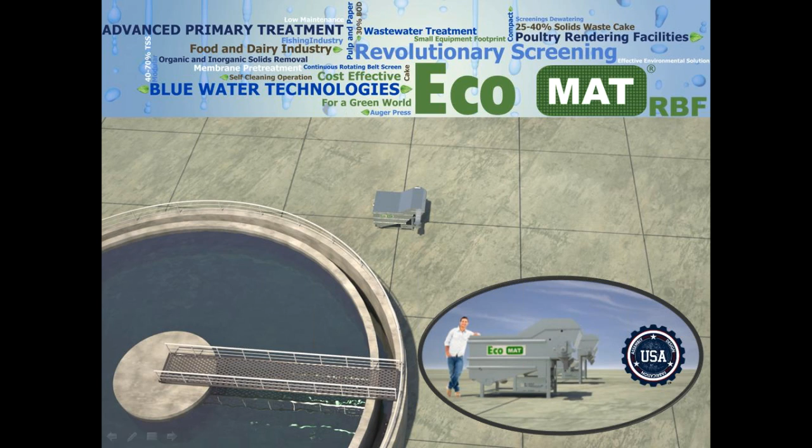So let's jump into this webinar. The technology that we will focus on today is the rotating belt filter, our EcoMat RBF. In the picture we show a 3.4 MGD EcoMat unit in perspective with a conventional clarifier, and you can see the direct footprint savings.

The EcoMat filter is a 4-in-1 process. Basically, you get your screening, your grit removal, your clarification, and your sludge management and dewatering in a single unit. It's a mechanical screening clarification device that gives you all of that in your dewatering. So we'll highlight some of the design features, some of the cost savings features as we go forward. The level of treatment and treatment efficiency is dictated by our design and operating parameters.

And these parameters are customizable to the application, to the end user's goals. Our focus being the EcoMat rotating belt filter, I want to give you a brief overview of Blue Water's background and history with this technology.

So I'm going to briefly tell our story to begin this presentation. Then I'm going to define a rotating belt filter and share some good videos and pictures to demonstrate its flexibility, its method of operation, and generally what it looks like.

This slide contains several pictures from rotating belt filters operating around the U.S. And here you see a head roll with the mat of solids being cleaned from a rotating belt filter device. So this device is installed with raw sewage coming into it. So this is before any screening, grit removal, etc.

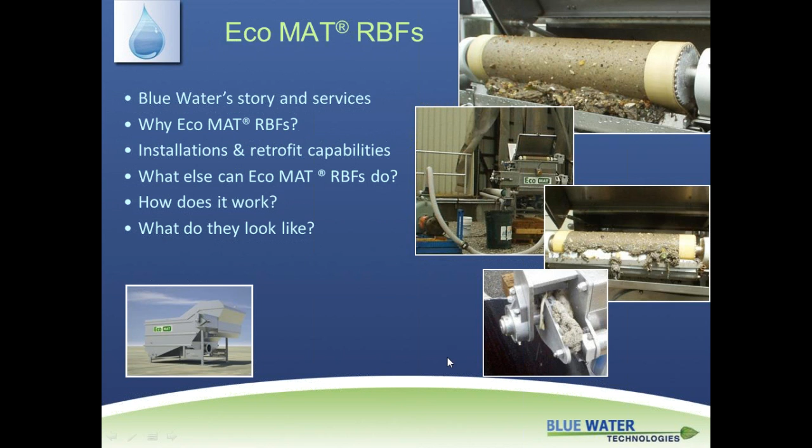So I'm going to start again by telling you Blue Water's background, Blue Water's story here. And Blue Water's really grown up in the USA. We're a USA manufacturer. Blue Water as a company is about 10 years old now, but we grew from a couple of other companies that have a good 20 to 30 years of wastewater history in the United States.

So we're a US-based manufacturer. All of our units and operations, as much of our components as possible, are made in the USA. We produce turnkey solutions and unit processes. So we focus on unit process efficiency, like our EcoMat rotating belt filter. I'm going to share some of the ways that we've developed that product line. But we can also focus on turnkey package solutions as well for the industry.

We've done a lot of package plants. We do a lot of mobile systems, not only for contract work and lease options, but remote systems like you would have in some of the mining camps to treat sewage works.

But we also do contract treatments for pilots, where we're delivering turnkey systems that need to be delivered to a site and online within a day. So we have a very capable manufacturing, operations, and service team for those scenarios and those kinds of applications.

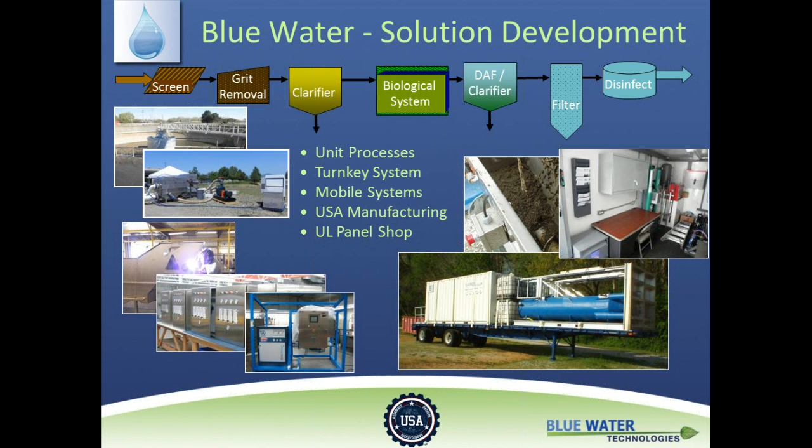We have a UL listed panel shop, which gives us a lot of flexibility in delivering and integrating to existing infrastructure and existing control systems. So we can tie in our PLCs for equipment seamlessly into existing SCADA systems, etc. That's Blue Water's capability. We have a culture of customer service. And with that, I'm going to start talking about our rotating belt filter.

Blue Water has been providing, installing, and servicing rotating belt filters for 8 years in the wastewater industry in the United States. Rotating belt filters as an umbrella technology is about 20 years old. It started in Europe, so with that 20 years of history, it's a very well understood, very capable process, well modeled as far as operations go.

One issue we see bringing technology into the U.S. is that a lot of it was developed a while ago. It's been proven, but it hasn't been improved upon as the need grows. So rotating belt filters had been fairly stagnant, and that's where Blue Water, through our design, implementation, and service history, learned ways to improve that technology and answer industry needs for an improved product line.

Blue Water launched our product line in 2012, the EcoMat product line. What we focused on was ease of operation, ease of service, and a reduction in overall costs. These systems are fully modular, fully automated, and operate essentially by themselves. Everything's automated with level control, pressure sensors, etc. Essentially you get a very high rate of clarification without chemical usage in a very compact footprint. That screening, grit removal, and clarification can replace a huge amount of infrastructure.

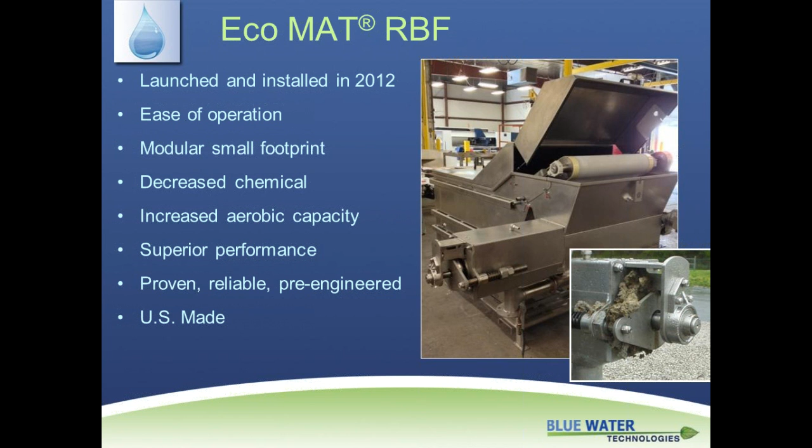There are different motivating factors to this. Some of it is simply cost-based, where you can get a payback if you're doing a plant upgrade versus conventional treatment. Some of it's getting aerobic capacity back, taking load off the secondary system. We've installed a lot of systems in the southeast for that reason. But ultimately what you get when you contrast rotating belt filters with conventional treatment is superior performance, superior TSS reduction, particle size control, hair and grit removal, etc. These are great in front of membrane systems for that reason.

When we look at new applications, there's a lot of different reasons to consider rotating belt filters. As far as design considerations behind implementation, we can start with the baseline we use when designing any Headworks system or primary clarification system. Really what we're looking at is the level of treatment, the treatment quality. What can we get to with implementation of rotating belt filters? Typically we're removing anywhere from 30 to up to 80% of the TSS with rotating belt filters, in addition to maintaining good particle size control going into the secondary system.

With that level of treatment, we have a high level of simplicity. You'll see this when I share a couple of videos illustrating how this system operates. It's a very simple system that produces this high level of treatment, and it's very easy to provide a multi-barrier approach with this because of its modularity.

As we've developed this product line, we've focused on ease of maintenance, which is a very important consideration. It's not only a cost savings thing, but it also ties into safety, another big consideration for Headworks design. We have to look at confined spaces, how much rigging and heavy equipment is being manipulated by operators. In addition, we're looking at environmental and odor control requirements as well.

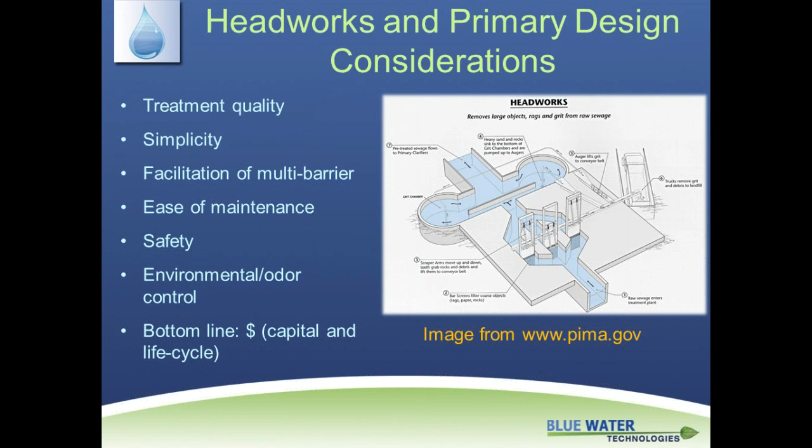As I mentioned, the bottom line is cost savings, it's money. This is yet another image that brings that concept home. You can say money in terms of space, as we've shown, contrasting the 3.4 MGD EM30 to conventional clarifiers, or you can say it in terms of capital costs, which you look at with a conventional clarifier.

And that's a 0.5 MGD capacity unit there. So again, you get a very high level of treatment in a very compact footprint. And you have two drives on that system there. It's a 1 horsepower belt drive and a 1 horsepower auger drive. So very low cost, very low input to cleaning the belt, to operating the system. There aren't any blowers involved. That was one feature that was used in older systems that was added to the expense over the lifetime of the system. And with these rotating belt filters, you'll see that they're very economical to own.

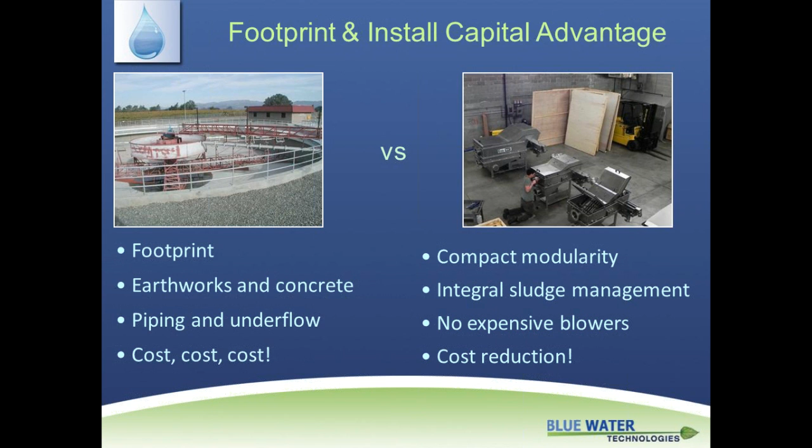The first video that I'm going to share is of an EM3 unit operating, which is a 0.5 MGD unit, and it's operating at capacity, just so that you can see what they look like in person.

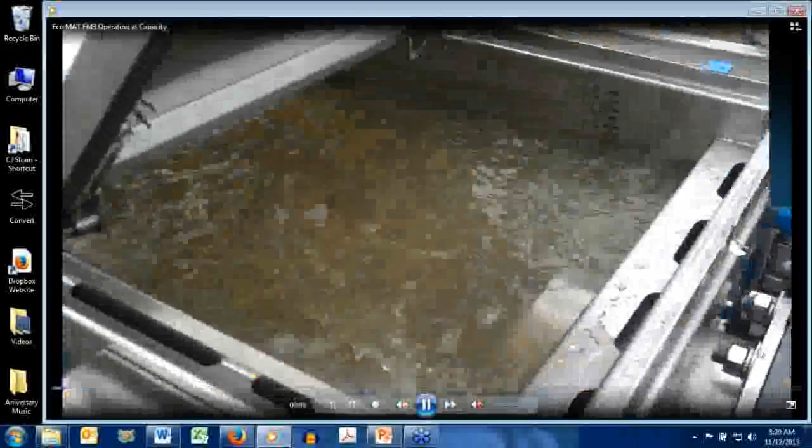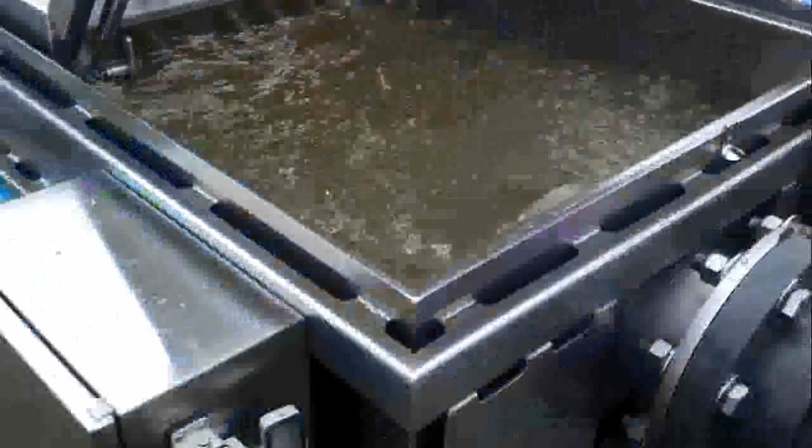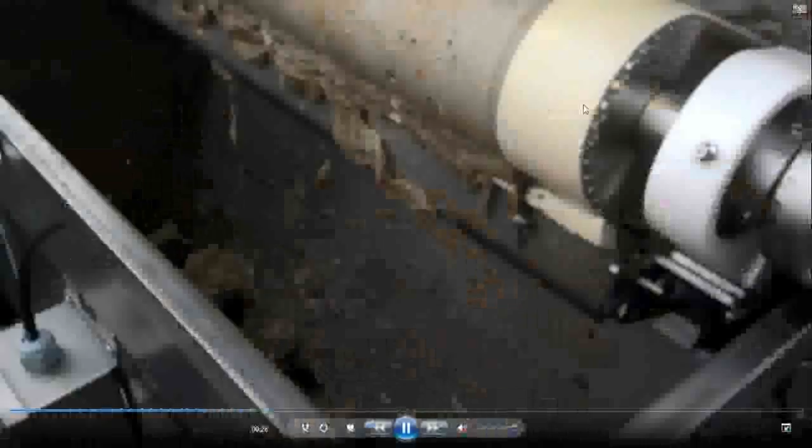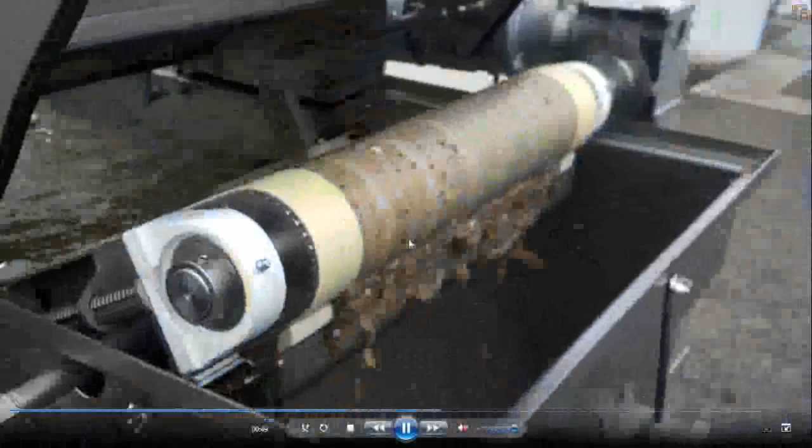So again, as I mentioned, this is an EM3. This is the influent water. The influent would come in through a pipework and enter this influent bay. This is on a level control with a flush wall-mounted sensor. We call it a foul-free sensor because it reduced a lot of issues that we had with plugging with some of the older styles that we used to provide to the industry. So that was an improvement. This level control bay is really controlled by the sensor tied to a PLC, and the drive on this belt that's discharging, the mat then discharges the captured solids over into this solids collection bin that you see here at the bottom. So this represents a very high capture rate, roughly about 60% of the influent TSS, and that's, again, doing your screening and grit removal here as well.

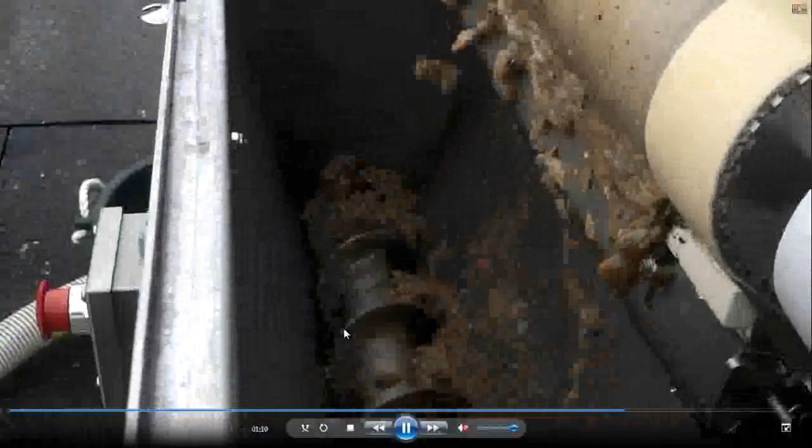That sludge is discharged to a sludge bin, and then it can be conveyed to a compaction section, which you see here. And that integrated dewatering provides roughly a 30% dry cake. Typically, we can get higher, but it depends on the economics of squeezing the additional water out of that. This bin is actually designed to aid in that dewatering. There's a perforated plate in the bottom that allows further dewatering without a lot of compression and energy involved.

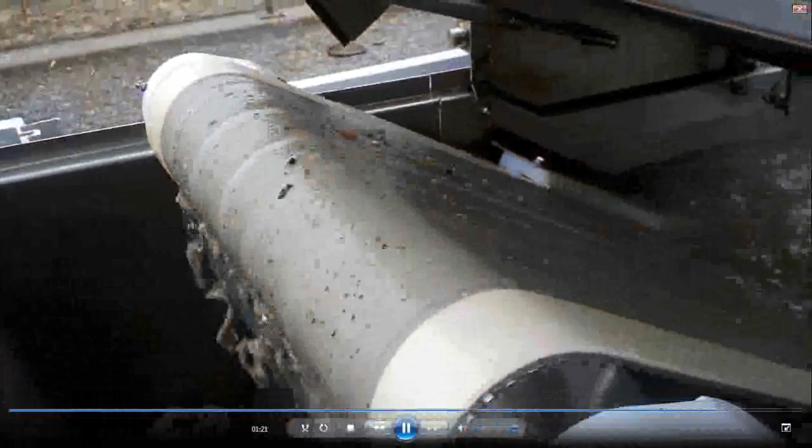So that's an EM3 system in operation. Again, what you're doing here is 4 processes in one. You're getting your screening, your grit removal, and your clarification, and then your sludge management.

And my next video is an animated video that will highlight the mechanism of capture, the mechanism of removal, so that it's a little bit more clear.

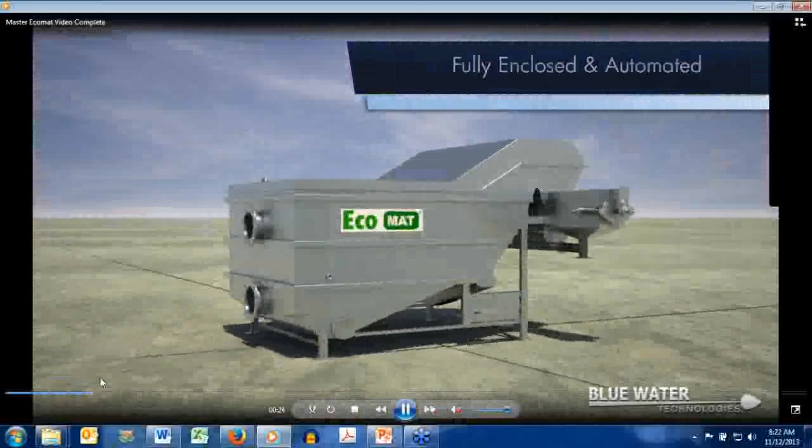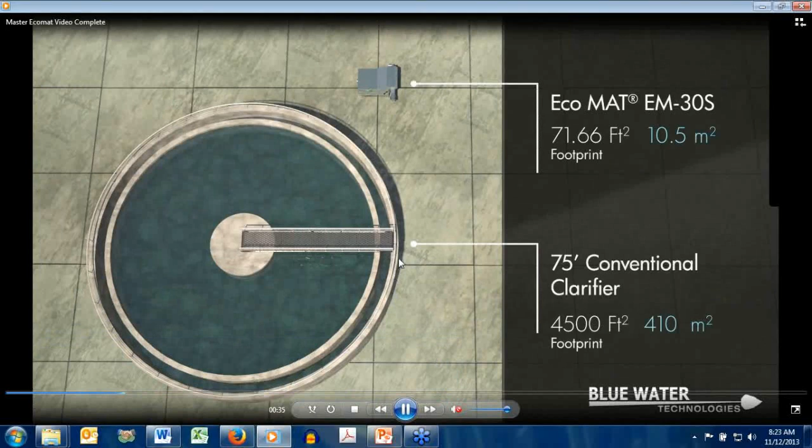I'm just going to skip ahead here. What we have here is our EM-30S unit being highlighted here as we go around the unit so that you can see the different features. Again, we would have a wall-mounted sensor in that influent bay. And when you contrast it again to conventional clarification, we're roughly 5% of the footprint. And that becomes even more important when you're in bigger plants, if you're in a 15 to 20 MGD plant where you have multiple units.

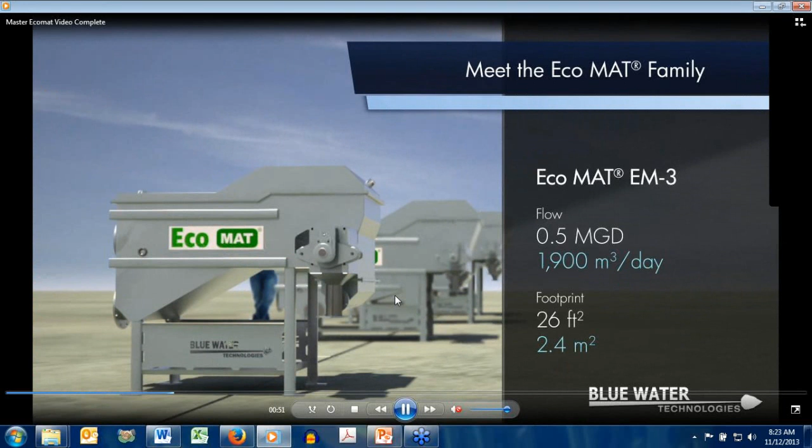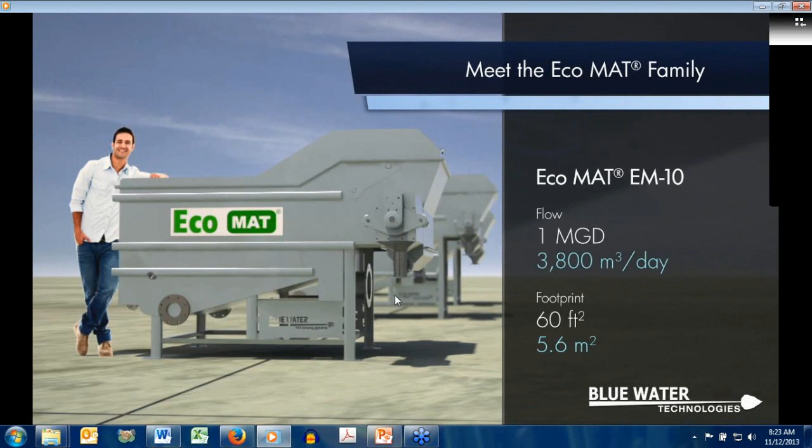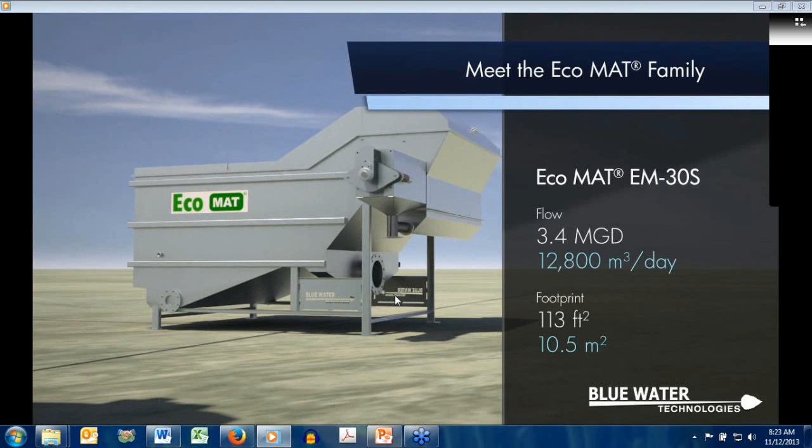Now this is a very mature product line, like I mentioned. We have multiple units within the product line ranging from 100,000 gallons per day flow, with our largest unit flowing roughly 3.4 MGD. Now this is all based on typical primary sewage influent, raw wastewater, typically between 250 and 350 milligrams per liter TSS. So that's what those loadings are based off of. Those loadings will change with solids. We are in some industrial applications where it's thousands of milligrams per liter coming in, and we will derate the equipment slightly.

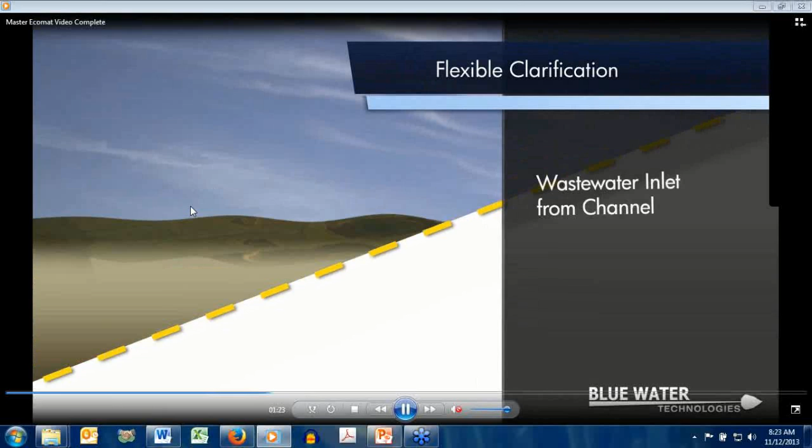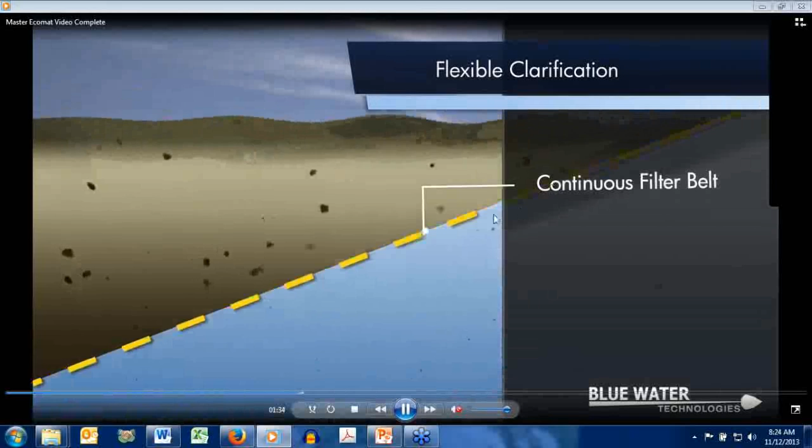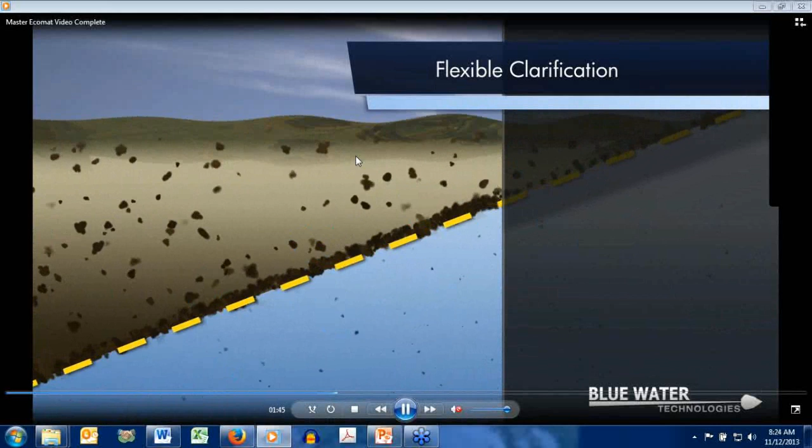So when we look inside of the EcoMat machine, again, this is a cartridge-mounted rotating belt filter, so you have a continuous loop mesh. This influent well, which we see animated here, again has a pressure sensor in it. So we can maintain a level control through a PLC, and really what maintains that level is that this belt is driven by a motor, again through the PLC. And that PLC is reacting to the head level, which will change as the particulate from the influent wastewater builds a mat of solids on this rotating belt filter. So that's really the key behind this technology, is controlling that mat thickness and getting that removal.

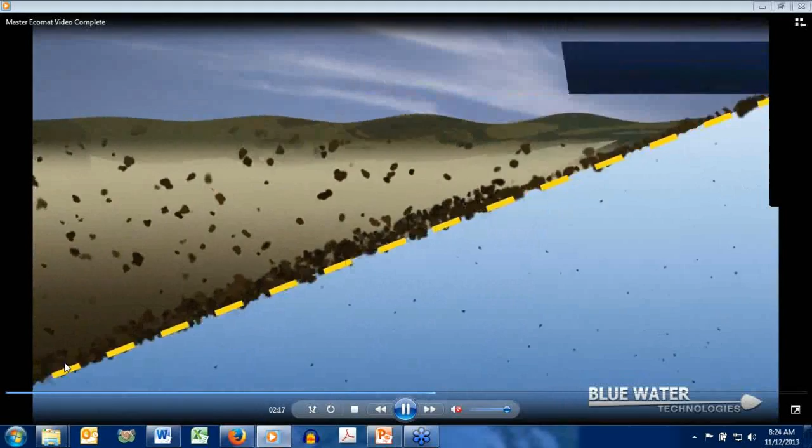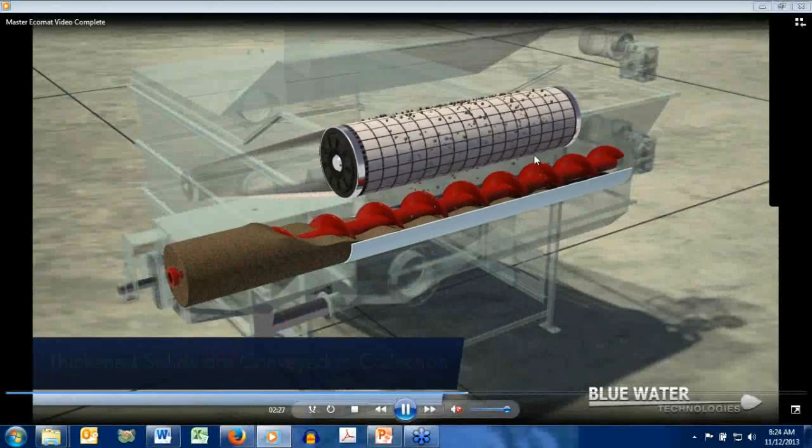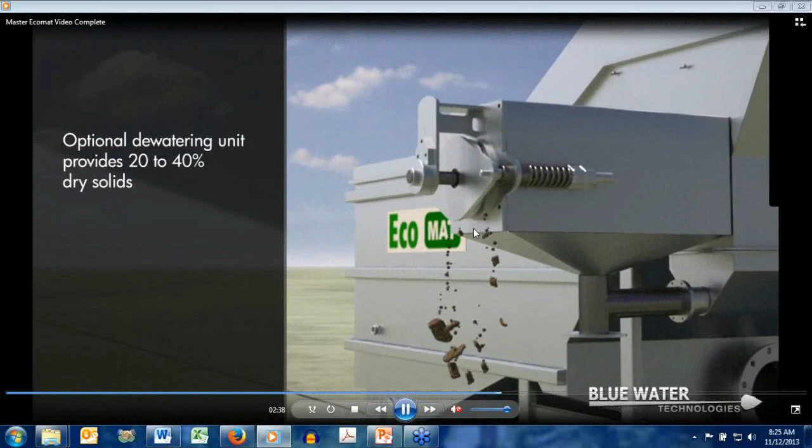So initially you're getting screening to the pore size of the mat, but then you build up that solids mat and you're actually getting filtration through it. And then you get the integrated conveyance of that sludge, of that captured solids, up into the sludge conveyance bin. And then dewatering is an option. This is a very robust dewatering design that Blue Water has worked on for many years now. We've provided dewatering equipment to the industry, and we integrated some of our best designs into this EcoMat rotating belt filter product line.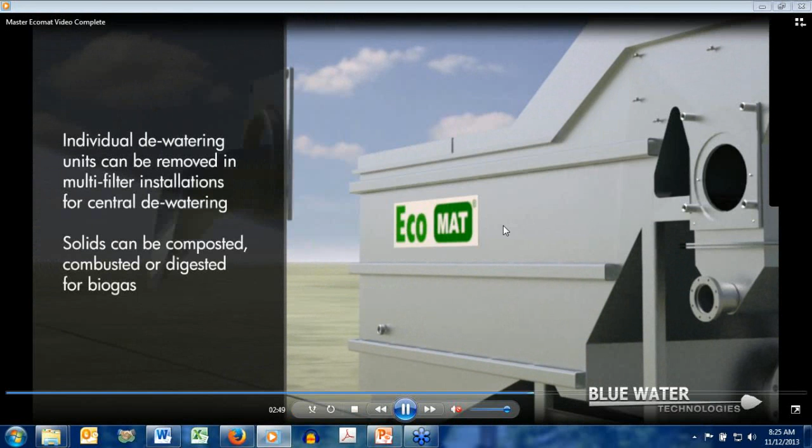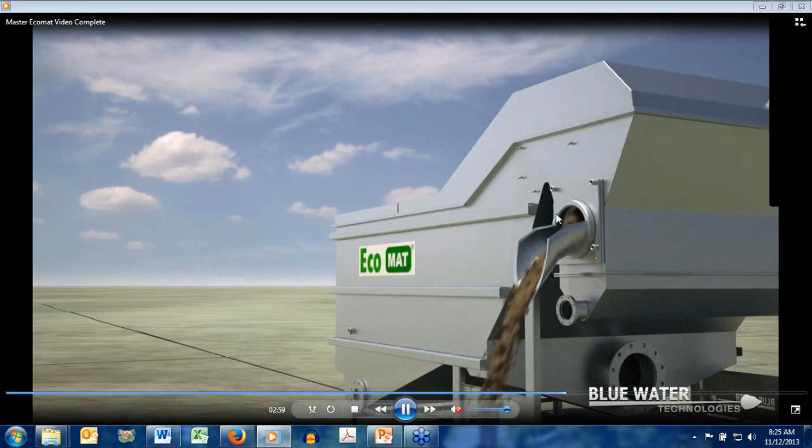Now, dewatering is an option. There are many plants that might have anaerobic digestion on site where they don't want to dewater. They just want that high level of solids brought into their digesters. And coming off the belt, those solids are roughly about 10% dry solids.

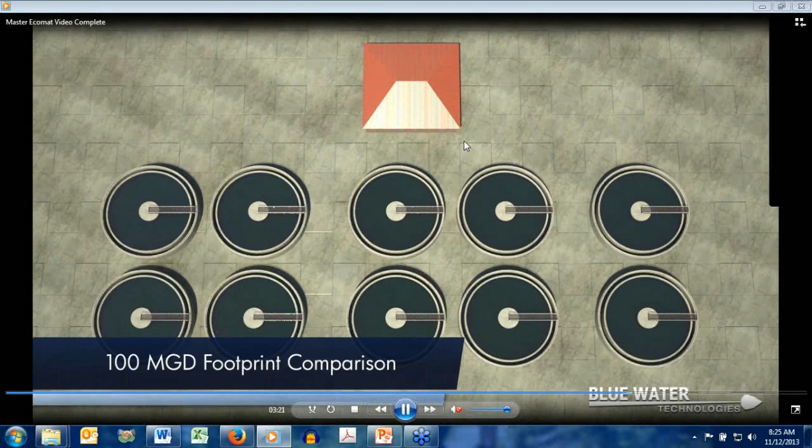Now, when we're talking much larger plants, we can also install these rotating belt filters in modules, and it's very easy to get your redundancy with this overall design. These are typically for very large plants. I do have a couple of plants with 5 to 10 cartridges, anywhere from 10 to 30 MGD design flow, that are going with this channel mount design.

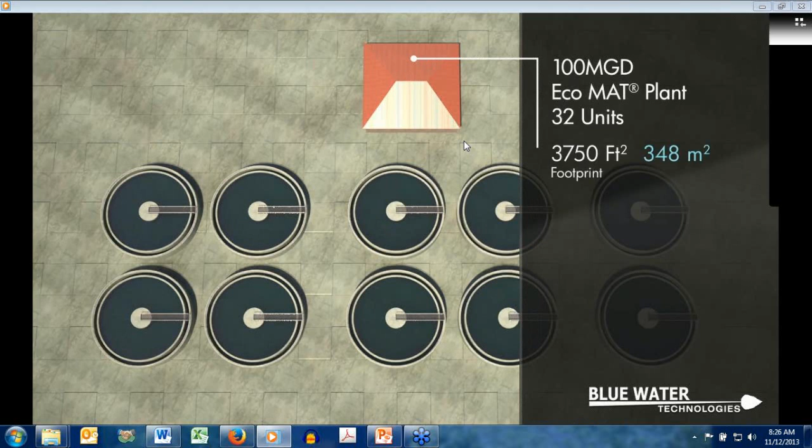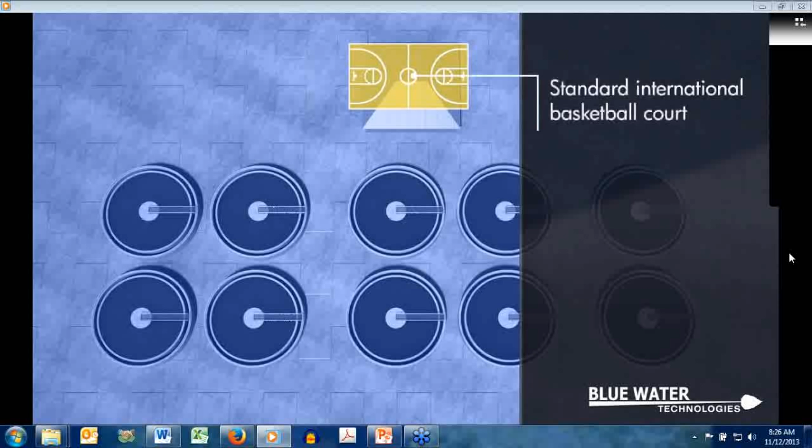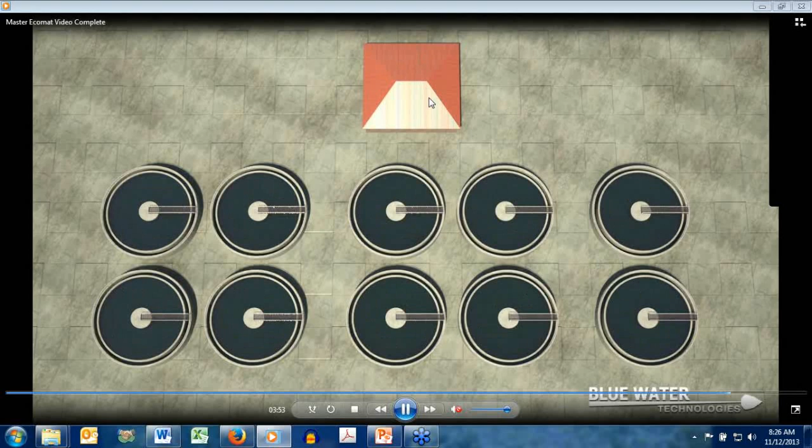In fact, some of the largest installations in the world for this technology, the rotating belt filters, is a very large plant in Mexico, over 100 MGD, actually peaking at 300 MGD. So a very large capacity with this modular layout style, and you can see the space savings potential for this technology and equipment.

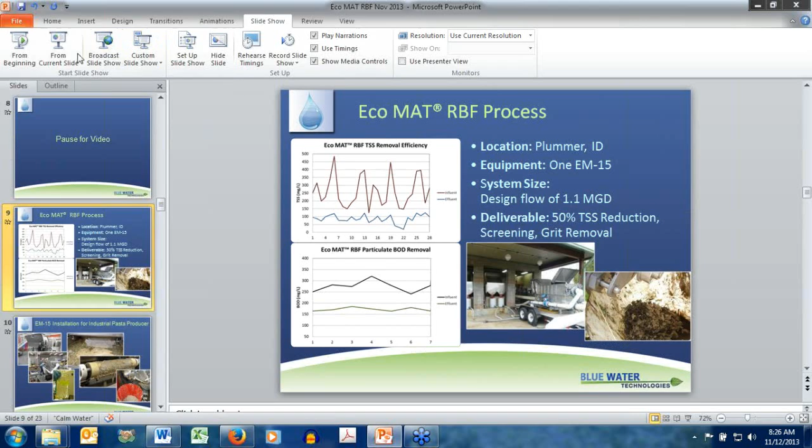So I hope that gives you a good idea of how the system operates, the method of removal, etc. Over the next 3 or 4 slides here, I'm going to share some of the case history that we have for the rotating belt filters and illustrate some of the different ways that it's been configured for operation.

This first one has a really good story behind it. The city is Plummer, Idaho, and we brought an EM15 EcoMat system down to Plummer. Now, they had a big problem with their Headworks, so it's very appropriate for our topic today. Their issue was it was actually a fairly new Headworks building, but they had installed screens for their primary or the Headworks screening and grit removal.

You can see those screens in these pictures, they're still in this plant. The issue with these screens is they had no automated cleaning, no degreasing, so the operator was getting up on a ladder and pressure washing these screens with hot water every single day.

So we mentioned all the considerations that you think about when you're designing a Headworks system, and there's so many reasons to fix that solution. One is the cost and the time spent cleaning these screens, but also the safety - you're up on ladders, working with high pressure hot water wash to degrease these screens, etc.

So huge issue. And the way that Blue Water helped to solve this issue with an EcoMat was we simply put one of our compact systems on a trailer. This is a system designed for roughly 1.7 MGD, which easily took the plant flow of 1.1, and provided them with a very effective solution for their screening and grit removal, and provided a nice TSS reduction as well.

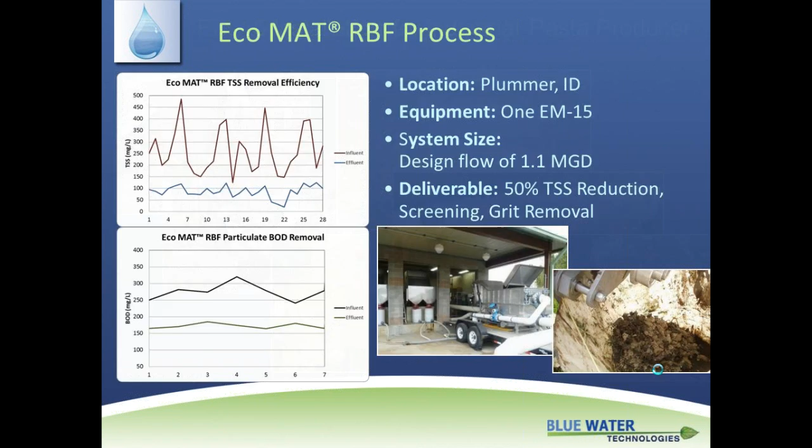This next case history is actually an industrial application, but I wanted to share it because it illustrates the flexibility of the EcoMat system. The EcoMat system is very capable of handling very high TSS streams.

Now, this is a pasta producer in the Midwest. They have anywhere from 3,000 to 5,000 milligrams per liter TSS in their wastewaters. Now, they were having issues meeting their TSS target in their effluent before we brought this rotating belt filter in.

We did some jar tests, we optimized the chemistry. This one we did add chemistry to because they needed a high 80 to 90% TSS capture rate. So this system illustrates good planning on the part of the engineer.

Blue Water got involved with the jar testing, the pilot operations for the engineer, and then I believe it was actually the engineer that purchased the system to get them - again, it was within 30 days of having tested because it got them the solution they needed, and they were installed with an EcoMat rotating belt filter. But again, it handles TSS very well, handles high FOG and fats very well in addition to that.

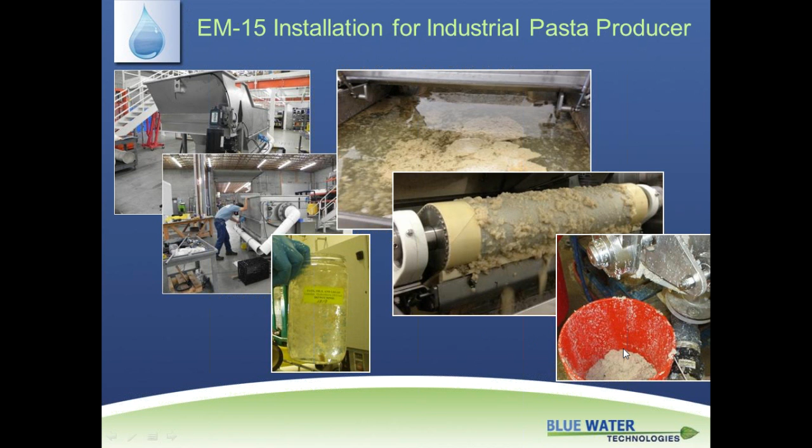The next case history I wanted to share with you is another municipal case history. This is in Post Falls, Idaho. This is an EM3, so it's a 0.5 MGD unit. This was actually a pilot system that was brought to the site. They're in more of a 5 to 10 year plan for upgrading. They currently have grit removal and fine screens going into their secondary, so no primary treatment.

And in the next 5 to 10 years, they're going to be upgrading that plant. The target here to model the system for their design was to achieve 50% TSS removal, get them their screening and grit removal, and dewatering as well. You see the operating line in this chart here, that's representative of roughly 59% TSS removal, so we met that target, and got roughly 38% BOD removal, so we met their target with BOD screening and grit removal as well.

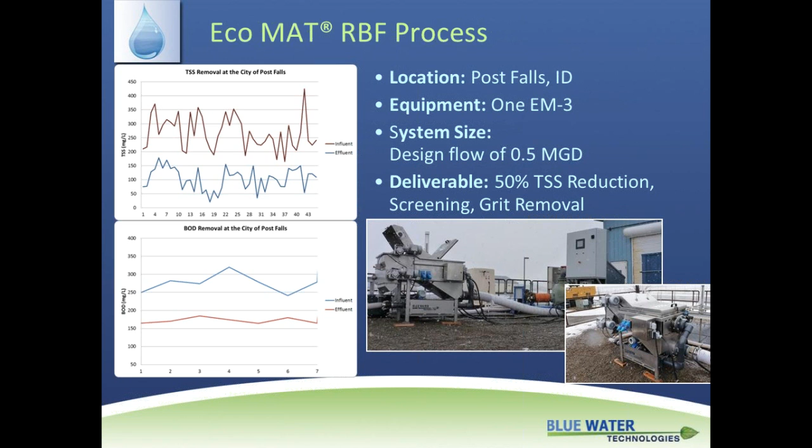Now, on this particular pilot project, we demonstrated that we can actually adjust our dewatering settings to achieve anywhere from 20 up to a good 45% dry solids with the sludge management. Now, again, that's a balance of energy input to dewatered solids and your trucking fees. And you don't necessarily want to dewater if you have digestion on site. So, also in that case, you might not want your screening and grit in with your sludge going to a digester. But those are all design considerations that Blue Water and engineers have worked on very closely in the past, and I'm sure we'll work on together in the future.

This is another case history where we're doing the screening, the grit removal, the primary clarification, and sludge management. Another EM3 unit, this is actually a full-scale unit. The treatment design flow for this plant is 0.4 MGD, so it's a slightly smaller community plant. The goal was 50% TSS reduction. Really, though, they wanted their screening and grit removal. The TSS wasn't as important to them, although you see the performance of the system here on the screen.

You do see they have a lot of rags coming in. This is a community, it's an assisted living community actually. Not that their wastewater is a whole lot different than anybody else's, but in this particular application, the plant had no screening, it had nothing actually. So it was just taking the raw water and screening, removing all of that TSS, and then dewatering and compacting.

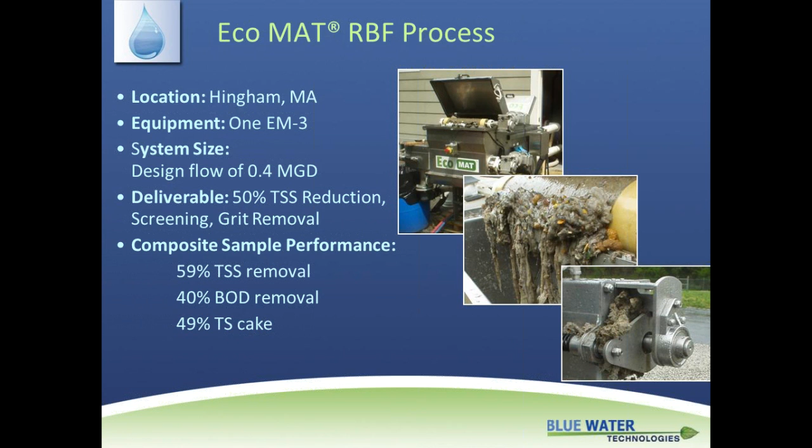Now you see a very dry cake here. Again, we can back off the tension, the back pressure, to give anything between a 20 to 50% TSS or TS cake. And again, our target really is one, pass the paint filter test so that you have a lot of disposal options, and to make it as economical as possible to manage the disposal of that sludge, that cake.

This last project that I want to share with you is actually a combined sewer project. And I think this is going to come up a lot in the middle U.S., where there's a lot of combined sewers. There's peaking events due to infiltration, etc. Those applications are ideal for, I should say, the EcoMat rotating belt filter is ideal for those applications. We can manage a very high peaking factor. This case history actually had a 10x peaking factor, and the deliverable really is to meet that discharge target for TSS so that the site can simply disinfect and discharge during those high peaking events, where appropriate.

So we went into this project and we were aiming for a minimum of 50% TSS reduction. We were actually able to average 70, and we actually pushed it, as you can see in this chart, up to 80% TSS removal. And this is all about adjusting and really customizing the operation parameters.

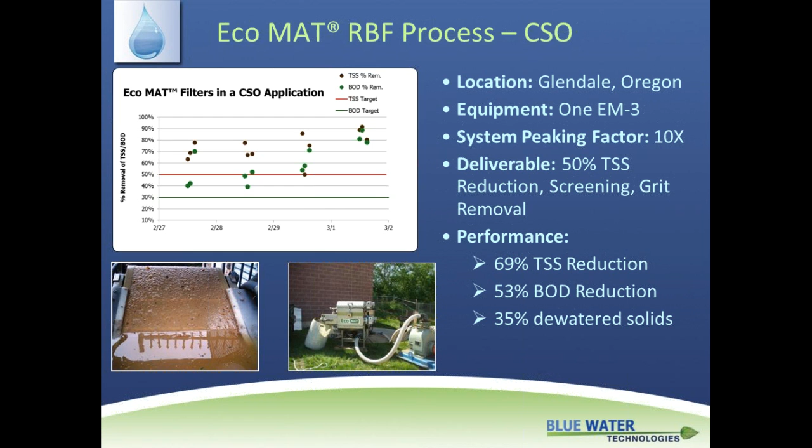There's no chemical involved, it's simply the EcoMat rotating belt filter. And we go in with a smaller pore size for this kind of application, and then just adjust the PLC settings so that belt movement is very slow, and we're building up that particulate, that mat of solids, and that mat does our filtration and screening for us. And again, the slower we move that belt, the more capture we get. So we might have to derate the equipment slightly hydraulically and go with a finer mesh, but it's very capable of meeting these primary treatment goals in CSO applications.

Most projects for us begin in the lab. We have a very capable operations team that can do bench process simulation for new applications. We use this a lot more in industrial applications, but we have used it quite extensively in municipal applications as well. I would say we did it more 8 years ago than we do now, because we have quite the installation base and reference list now for municipal projects anyway.

But for a lot of industrial projects, or even if we need a few data points on a municipal project, we can do bench tests where we basically use sieve discs, and we'll pour water through these discs, and we'll look at the formation of a mat, the thickness of the mat, the porosity of that mat, and its capability to do further filtration in our rotating belt filter methodology. So that's something we can do on a bench scale.

We can bench scale actually all of our product lines. We do it with Blue Pro systems, our clarification systems, other than the EcoMat, like our EcoDAF, Eco IPS 55s, and our press dewatering, etc.

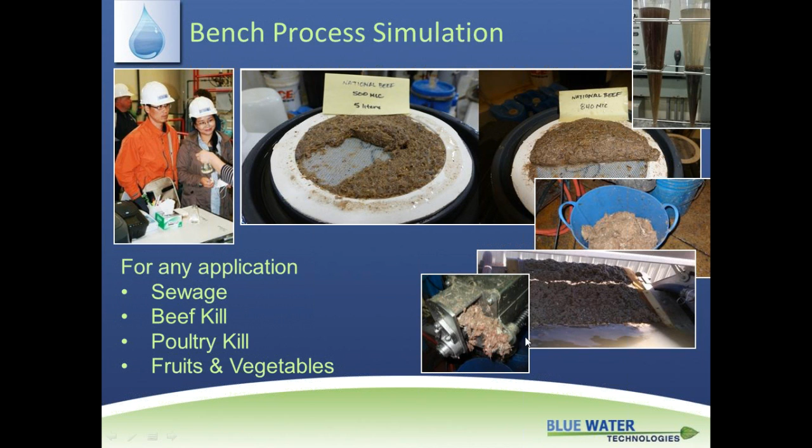Now, I've mentioned that's a first step into a lot of different industries. Here's a list of the different industries where we have experience with rotating belt filters. And we're actually getting a lot more interest in the EcoMat because of how much we've improved the technology with energy reduction and serviceability. I've talked about grit removal, fine screening, primary clarification.

I would say one of the biggest growing applications in the municipal world is membrane pretreatment. Screening, getting all that grit, hair, plastics out so that you're not fouling membranes. That's a huge application, and I think we're going to see it grow quite rapidly over the coming years to protect membrane plants, whether they be MBR plants or plants that have tertiary membranes.

Sewer overflow I mentioned and highlighted as well. We've been in a variety of different industries. We have installations in the dairy industry, applications in pulp and paper, textiles, tanneries, etc.

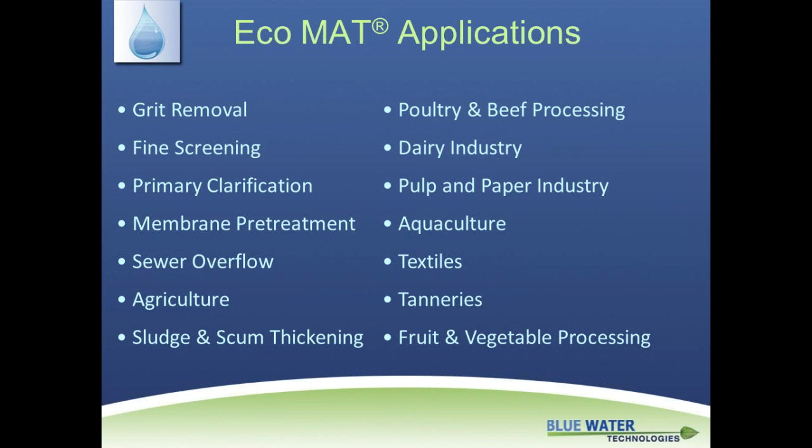And I mentioned oils and greases. It handles oils and greases very well. We see a lot of that in the meat processing industry with poultry and beef kill. We can see TSS up to 5 to 10,000 milligrams per liter. We can see BOD in the several thousands. And this system is very well designed for managing that loading, according to our design parameters.

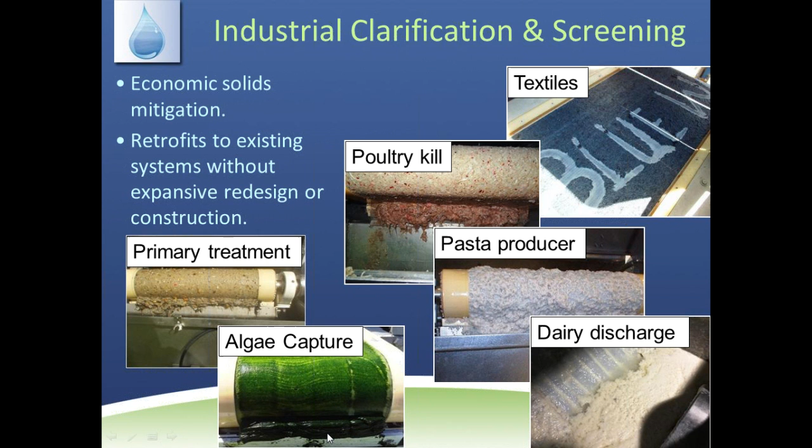And we've done a lot of work now in algae capture where we're harvesting algae, getting anywhere from 60 to 70% TSS removal, getting appropriate algae capture for various algae farms. So there's another application that we've done in the past. And I just thought you would like that. It's a fun slide for me more than anything else.

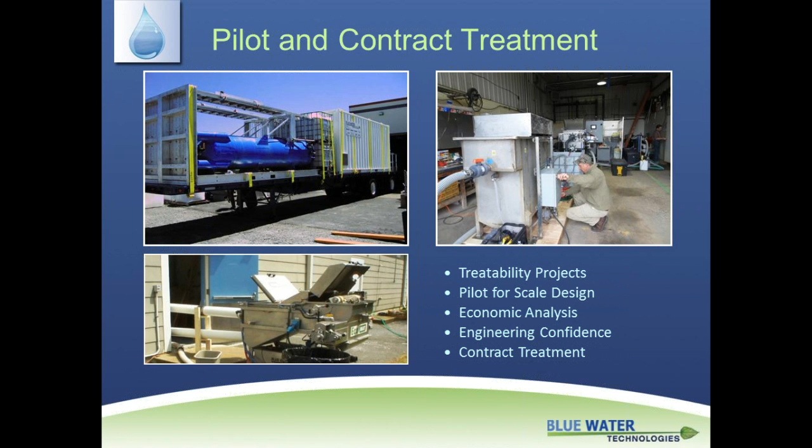And again, the different reasons for doing field service or contracts or leases, etc. It could be treatability in design projects. It could be contract treatment through construction and implementation phases. So there can be various reasons for doing this, and we again have a very capable program for that to fill that need.

I want to take a look inside of these cartridges now and give you a closer look at what the inside looks like, how they operate, and the key design features.

The influent would hit this baffle, and this entire bay would fill up with water. There's a wall-mounted pressure sensor that's flush with the wall.

The way things used to be with older designs, and there are still a couple of players in the industry that use these old designs, they basically have a vertical pipe, a stilling well if you will, where they suspend a pressure sensor into the influent well. The shortcoming of that is you get solids build up around that sensor, leading to faulty readings and failures, and it's a maintenance nightmare. You have to clean it daily or weekly, whatever that frequency may be.

So we got away from that. We especially had problems with that in our poultry industry, and thus we got a new nickname for this configuration, this patent-pending pressure sensor configuration. We call it our foul-free sensor because in those days when we were in poultry plants, we'd get a lot of feathers and ridiculous things building up on it. So that's one nice feature of the EcoMat product line, that patent-pending pressure sensor integration.

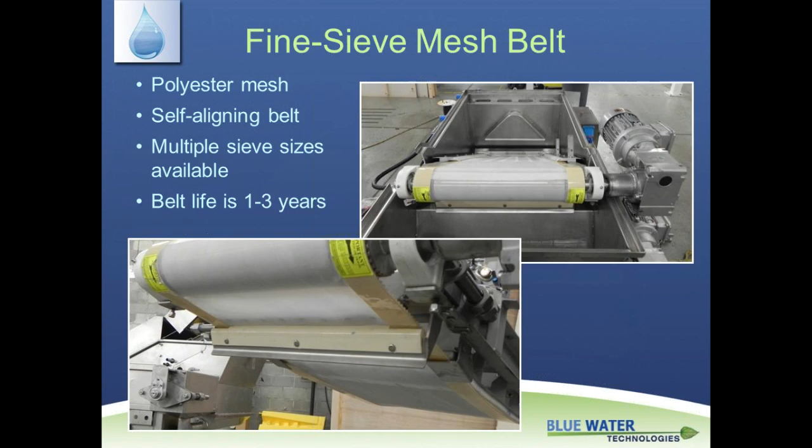This periodic degreasing is programmable, set up on a timer, so it typically cycles on for 2 to 5 minutes, maybe 1 to 6 times a day, which would be realistic. I'd say it's much more frequent in industrial applications where you have higher fog and higher grease. A lot of our applications might degrease once or twice a day.

I want to focus on the fact that Blue Water's intention with this cleaning system was to reduce energy cost, because one of the issues with this technology, again it's 20 years old, the rotating belt filters started out with blower systems. Those blower systems work really well for cleaning, they're effective, but they would span the belt with an air knife, so you had this slit that could be clogged or whatever.

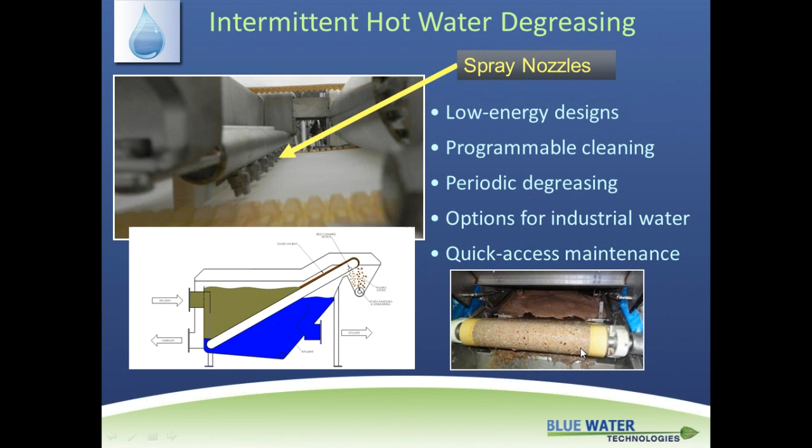We have a patent-pending access hatch where we're able to remove and maintain the spray bars, the cleaning mechanisms, etc. That's something you won't see anywhere else in the industry. Those quick accesses allow us to maintain parts of the cartridge without removing it from the container - so again, for safety, time, and ease of maintenance.

These can be installed modularly. Typically we'll go with a duty standby unit for redundancy in many applications. Other applications might just have a side screen or static screen for backup, so to speak.

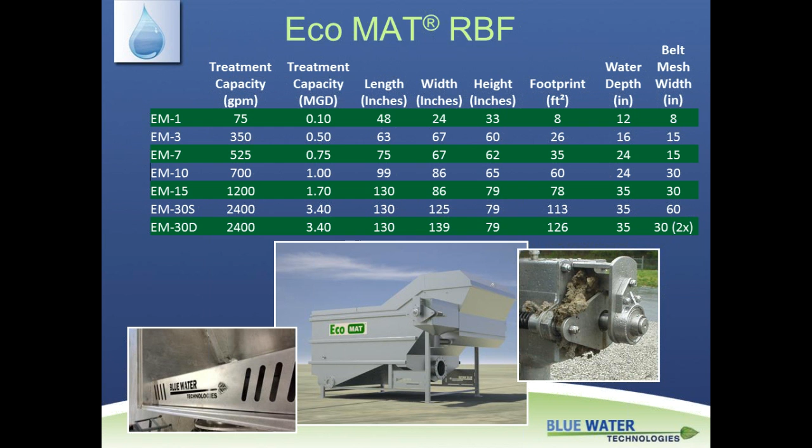Now, I did mention that Blue Water offers a dewatering press line. It's something we've done for many years, and it's something we integrated into our rotating belt filters.

One of the drawbacks we found in the industry, servicing rotating belt filters for so long - some of the older product lines available in the marketplace - was that their dewatering was really undersized. There were all sorts of maintenance issues.

There were many maintenance things we overcame with our EcoMat product line, as I've described. But another design feature that was definitely a shortcoming was the dewatering. Sometimes in applications we would struggle to get a 20% dry cake.

In fact, with some of the older product lines we used to provide in service, we actually had to retrofit the screws. So when we launched our EcoMat product line, we used our screw technology, which has a great, very capable history, and we integrated that design into our rotating belt filters.

They've been used in a lot of different applications. We have several different sizes of screws. On our EcoMat filters, we have anywhere from a 3-inch up to a 10-inch screw as a max on these systems. Now, we do have much larger screws, up to 16 or 32 inches, for the standalone product line.

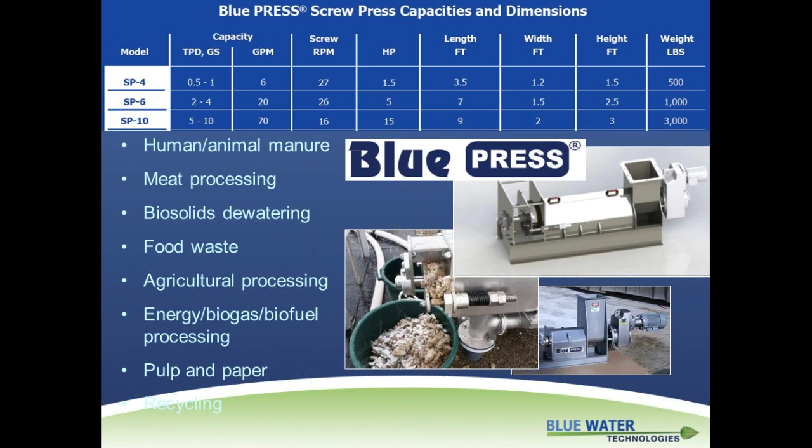So I want to wrap up this conversation with the EcoMat assurance. We've covered a lot of benefits of the rotating belt filters - you've seen case histories with the TSS removal, the screening, the grit removal, the dewatering, and sludge management.

The nice thing with the above-ground systems is that all of the piping is exposed for access and maintenance, and you're reducing the total volume and amount of piping and management infrastructure that you'd have with conventional clarification, screening options, etc.

We do have a lot of different materials for construction available. Our standard is 304 stainless, but we can provide 316L. We do have some industrial processes, like pickling, with high chlorides, where we'll actually supply a 2205 stainless. So we're flexible in that regard.

Now I want to highlight that we've focused on minimizing the power input to these systems. There's no blowers, there's no blower lines, there's no vent lines - those are all money-saving. That design is a money-saving, economizing design parameter.

We use doctor blades and pressure spray bars basically to keep the belt clean very effectively - again, roughly a 75% power reduction over what was available in the industry before.